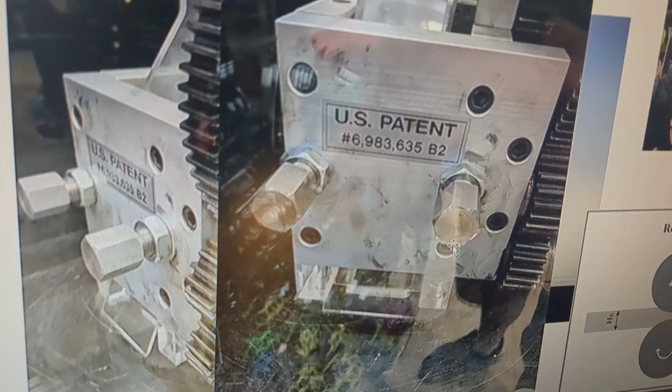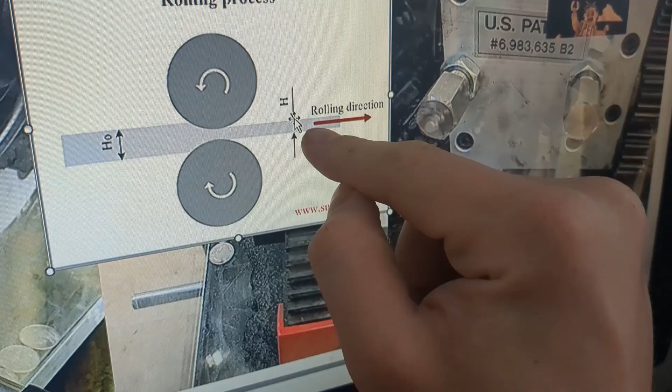One thing that I can't get over, my whole life I've been looking at this, the penny presses look kind of straightforward. All we got is a handle that goes into this crazy gear ratio and moves what's called a rolling mill. Basically, you put metal on one side, the rolling parts of it squish the heck out of it and spit it out a little thinner. And if you just put a design on the roller, heck, you can put any design you want on there and it squishes it onto the penny. It doesn't look that complicated. And I think, honestly, I could probably make one of these. And then I can take it to William Osman's Open Sauce and he's gonna go, that's pretty cool. And I'm gonna go, yeah, it is.

1 week later. So I got good news and I got bad news. The good news is I got the university to pay for my project. Because it teaches a manufacturing process, the manufacturing professor was interested in making the design, especially if it outputs the amount of force that is pushed onto the rollers, onto the pennies. The bad news is I went and talked to the machinist that we have on staff at the university, and he told me that I'm probably not going to be able to do it within one semester, which is what the university is willing to pay for. The reason is that an entire gearbox with that kind of gear reduction is gonna take more than a semester to make. It's just gonna.

But one thing that I could do is purchase a jewelry rolling mill that already exists online. They're typically made to roll jewelry or make necklaces or something stupid, I don't know. But what I'm gonna do is purchase it, take it apart, modify it, use the gearbox that's already included, and put it inside of my penny press machine. And so that's what we're gonna fucking do, I guess. All right, so here's the update as of fuck.

I'm sitting here measuring tons of pennies to see how they change in thickness, how they change in size and width and everything to put it into my CAD model, so that way I have a good idea of what the rollers on the mill are supposed to look like.

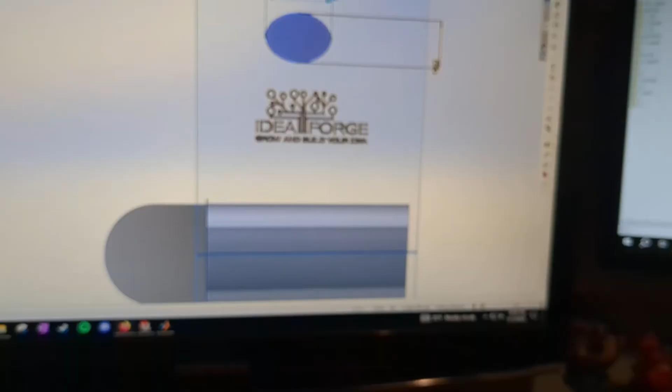Basically, as soon as I had the design on the rollers, I started sending it to a bunch of different job shops in the area, trying to get quotes. And as they were coming back, they were crazy expensive. So I started to reach out to other companies that may not specialize in this, or very specialized companies that have laser engravers and stuff like that.

And as I was waiting for those specialized and not specialized quotes to come back, I realized that I needed to start working on something else in order to get this project done on time. So I started jumping into the electronics and getting the Arduino working, getting the Raspberry Pi working, figuring out how to use Python. So that's what I jumped into next.

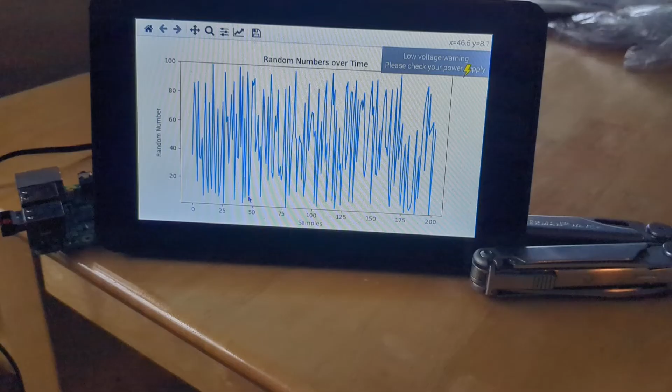All right, I finally got an example code working. Ignore the low power voltage. That's more of a guideline. But right now, it's graphing nothing. It's graphing noise. It's graphing meaningless data.

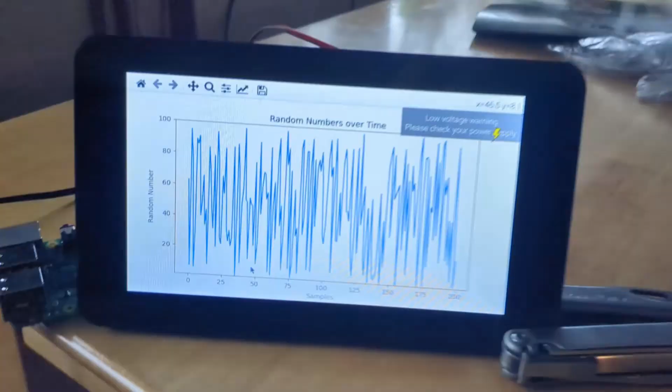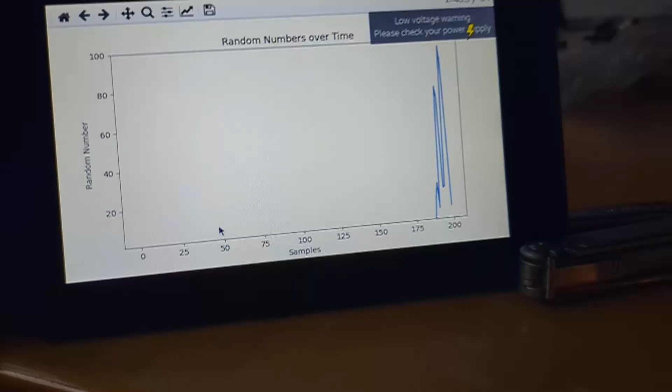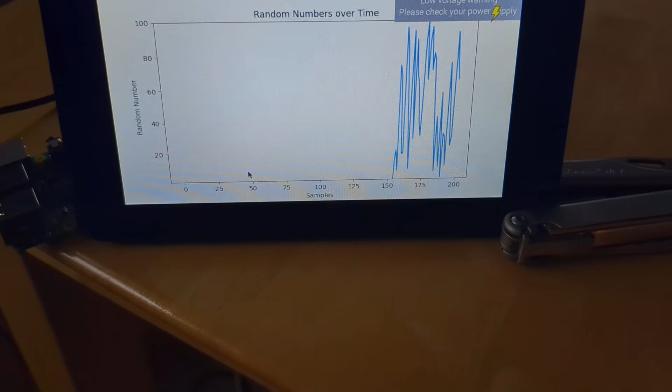But when I click this button, it shows me the data, closes it, and then I click the data again, and it starts over, shows the data all over again, which is going to be analogous to the sensor on the guy stopping and starting over, and it turning on and off is going to be that. Yeah, that made sense. I don't care if that doesn't make sense. This took 4 or 5 hours, and I haven't eaten yet. Look at it go. Yay.

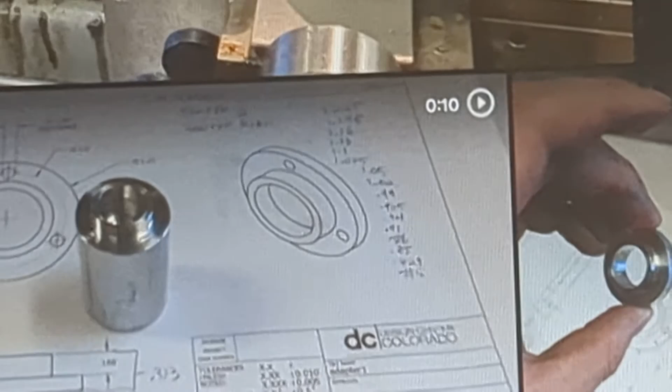All right, just real quick, I need to come up with a bridge between this video and machining the first part. This little part here is an adapter for the load cells that will be mounted onto the penny press machine. The only issue is I bought the load cells from China, so they took a long time to ship. So in the meantime, in order to get this project done on time, I needed to make the adapter so that way I had it ready for assembly when it finally showed up. So let's jump into a documentary about how this was made.

There's no way any of this is going to be usable, but I'm machining the adapter part right now to the correct diameter so that way this can hold onto the load plate, the load cell, without damaging anything. And right now it's going great. We're almost to the diameter that I want, and I will check back in once this is complete.

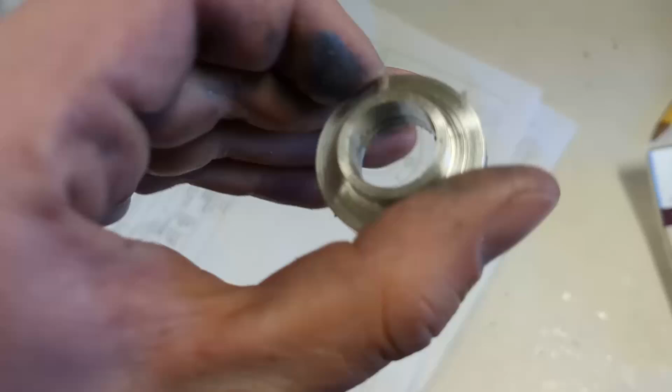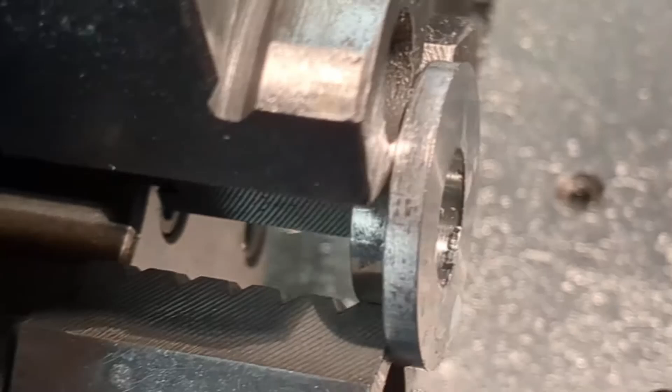There's definitely no way any of this video is useful, but now I'm drilling a hole through the center. I took this video, but I did it in this way, and that way sucks. So here's my part. Still gotta clean up the back of it, but there she is, baby. All right, last thing, we're gonna make the back half of it the right dimension so that way it's what it is on my drawing. Here it is, it's all set up, and let's do it.

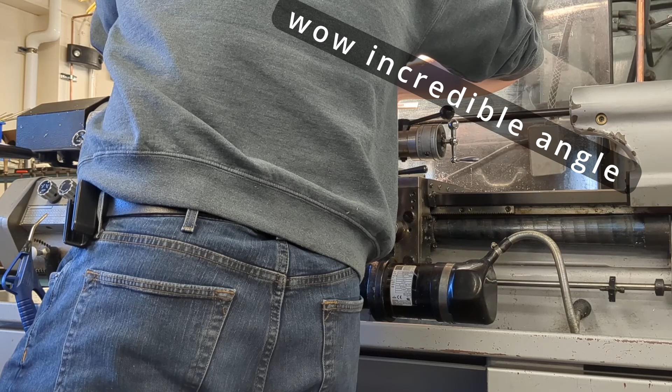Edge finder? I hardly know her. Got him.

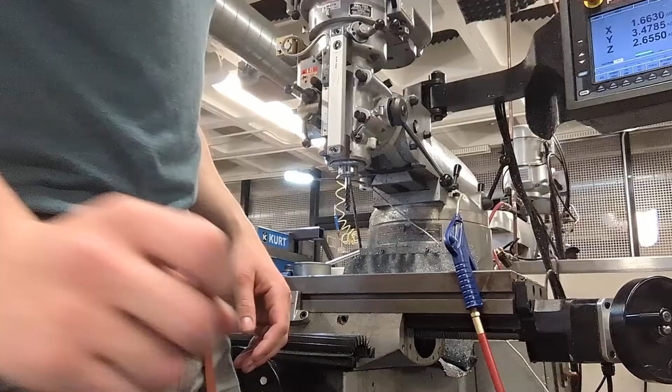So fun fact, I finished the part, but the screws are not going to fit between the wall and that hole. So we're completely starting over, making a new design that instead of having this lip on the inside is just going to be thick all the way through. Think about things twice before you fuck them up, guys. That's the lesson here, kids.

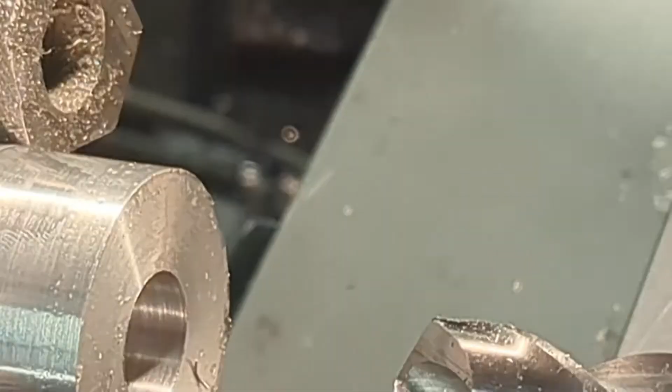Would you believe me if I told you I just jammed this in there without it running? Just all the way through without even trying? Because if you did, you'd be stupid. I turned it on first. I forgot to say it, but

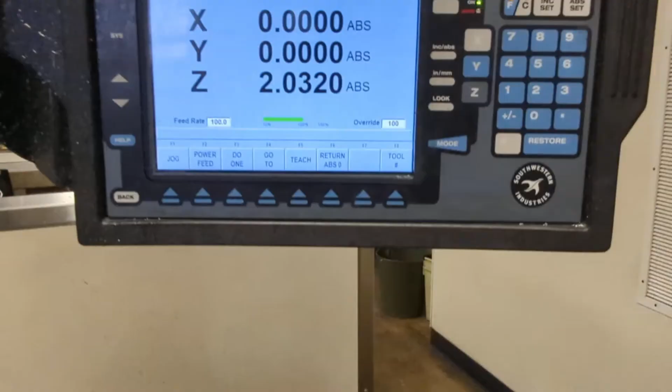Edge finder again. I hardly know her again. Fucking nice, dude. Got him again. 2 in a row. Oh, I almost dropped it. Let's have video evidence of me fucking this up. Mode. Run. Go.

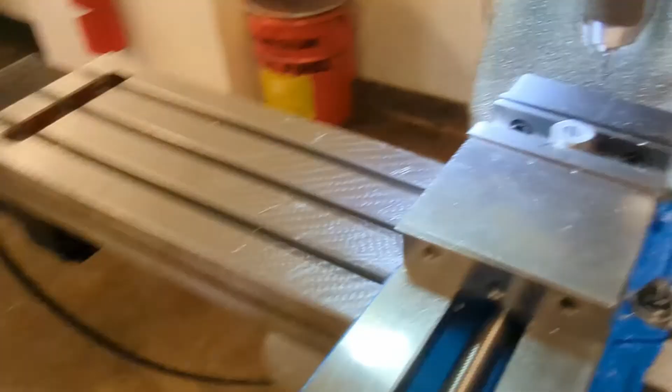Start. Go. Load tool. Go. Oh! Oh, it did it. Whoa, that is not flat. Did you see how much that moved? Oh, shit. I gotta edge find again. Fuck. She's not as, like, sexy looking, just because it's more of a lame part, but that's it. It's gonna be cut in half twice, and then it's gonna be that, but better and actually work. Let's go! Kinda looks like a face.

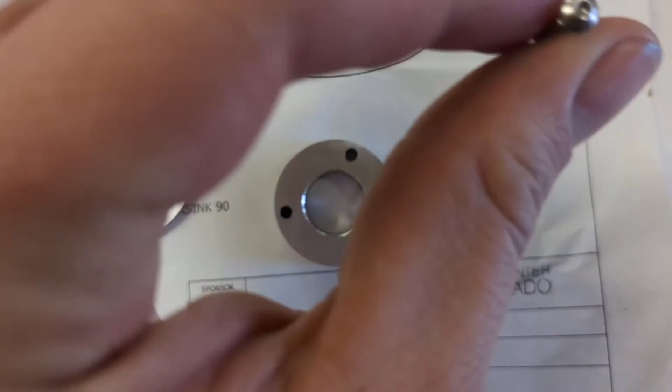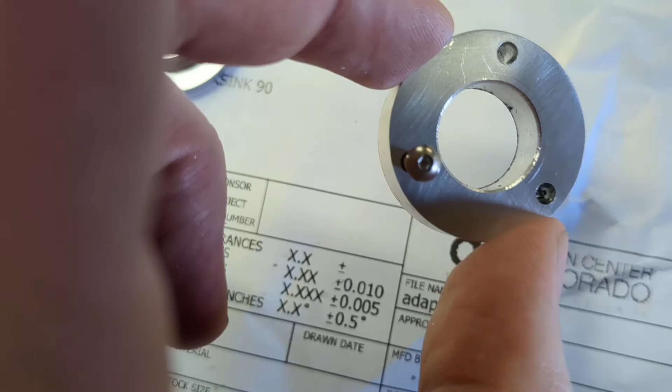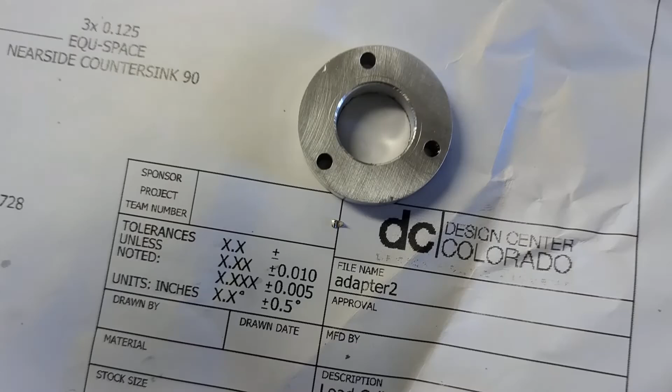Oh! Alright, so we redesigned this part because we were worried that the screw wouldn't fit in those holes. So we redesigned it to use more aluminum, and now, obviously, if I put it in correctly, it fits, right? Like, wow, perfect. No big surprises there. But then we were like, man, I wonder if it will fit in here. Yeah, it fits. We wasted time. We're still gonna go with this design because it's simpler and simple is better, but damn. All right, fuck me.

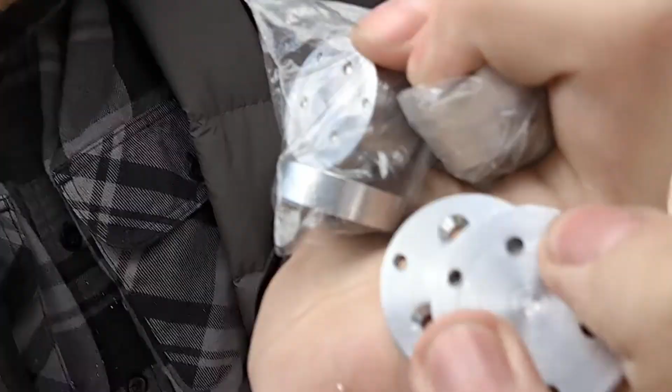Right, I'm running from the machine shop. That's the machine shop over there, because I'm gonna be late for office hours, but I got the parts done. You can't see it there. I got the parts done. There they are. They're countersunk, and that's not the side that's countersunk, so you can't see it. There's the countersink, it's on the bottom one. So that's looking good. And now I need to connect it to the load cells, which should be coming in the mail anytime now. And if they are coming in the mail soon, then I'm gonna put them on right now.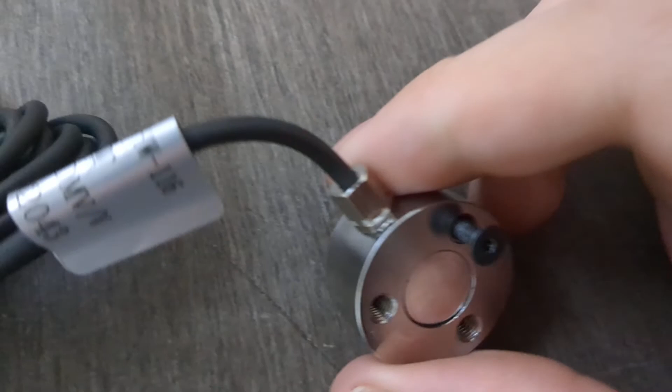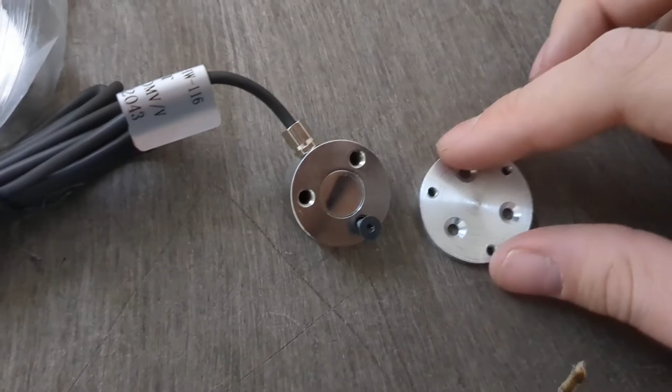1 week later. So I'm literally filming this on a trash can because I don't have a desk. But the load cells arrived in the mail and everything is good. And the holes line up just fine. It's kind of hard to see, but they line up. The only issue is that even though the spec sheet looked like it said M3, it is definitely not an M3 screw. I think it's just gonna be a super quick fix. I think I can just widen these holes and everything's fine. That's just a small loss right there.

Whatever. I finished the adapters for the load cells, and I was waiting for the rolling mill to arrive in the mail so that way I could guarantee that it fit. However, it was still in the mail. So what I did was I drove to the local steel yard and I bought some steel members and I started prepping them to weld them into the main frame.

All right, so even though we bought the steel, and you think that we can just take it to the machine shop immediately, we cannot, because this is what it looks like when it's clean. That's how it looks when it comes from the vendor. It's all dirty and crap. I mean, look at my hands. Jeez Louise, my phone's gonna be dirty for years.

But it's dirty, so we gotta clean it, which means lots of scrubbing and spraying and scrubbing and spraying. This is the third one. We got 2 clean ones, and we got 1 more dirty one. So hopefully we're able to get into the machine shop today. If not, I'll do it tomorrow, I suppose. Yay!

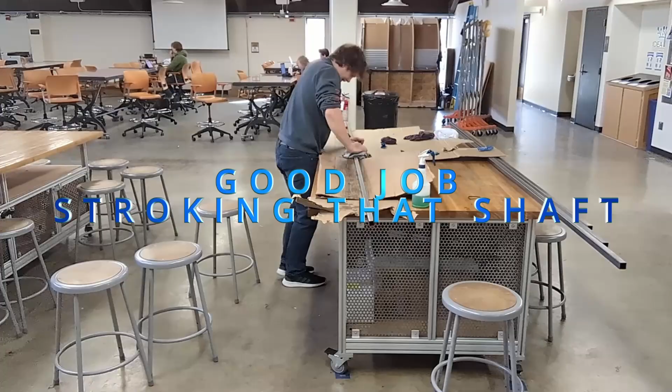After I cleaned all of the members, I needed to print out my drawings to bring down to the machine shop, because without an engineering drawing, the machinist won't let you cut anything. So cut to me printing all of my drawings.

Oh, the printer. We're gonna print. Gotta sign in. Wait. Don't look at my information. Don't do it. Hiding it. Can't see it. Oh, I just dropped all my coins on the floor. Why am I doing this one-handed? There has to be a better way to do all this. Oh, look at my coin.

Wow, I really hope my ID wasn't in this at all. That'd be so bad. Okay.

Files to print, all of the files. Print. Sweet, oh that one. Printing. Yay. First person to tell me what's wrong with this drawing wins a point - they only printed half of my drawing, which is probably fine. All my information is on that half of a drawing, but god damn it, son of a bitch.

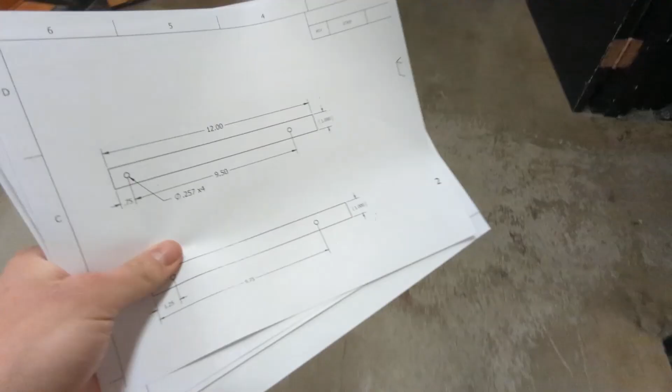Whatever, I'm gonna bring it to the machine shop, we'll see if they're okay with it. Fuck it, it's getting loud in here. Gotta walk all the way over here and show them the chaos that is my homework.

Let's see. Look what happened to my drawings. That's fine, they're fine? Yeah, they're all like that. They're fine? Alright, we're gonna do it.

Alright, smash cut to all these being cut except for one right now. They're cut. We got all of them. And then we just gotta mill them, which is gonna be fun, can't wait. We're gonna do a test fit to make sure they all lay, and we got some scrap.

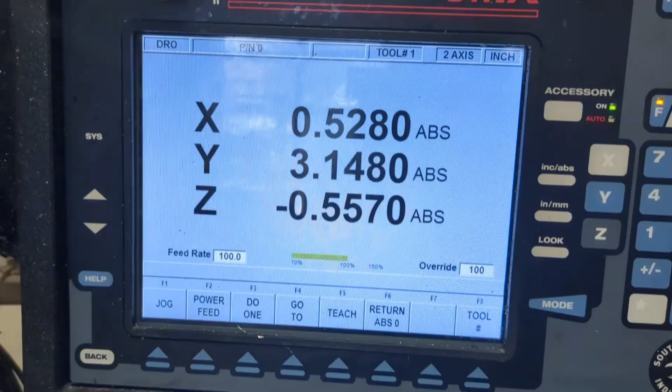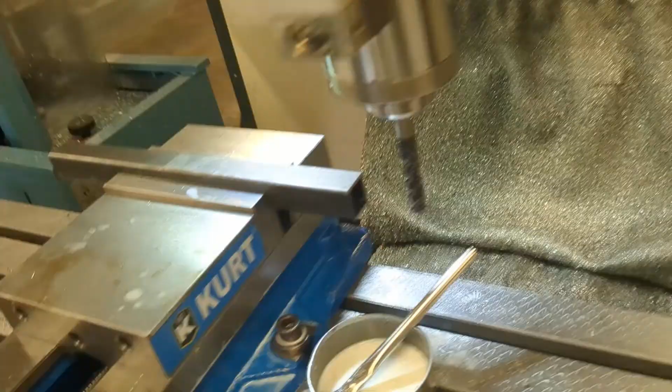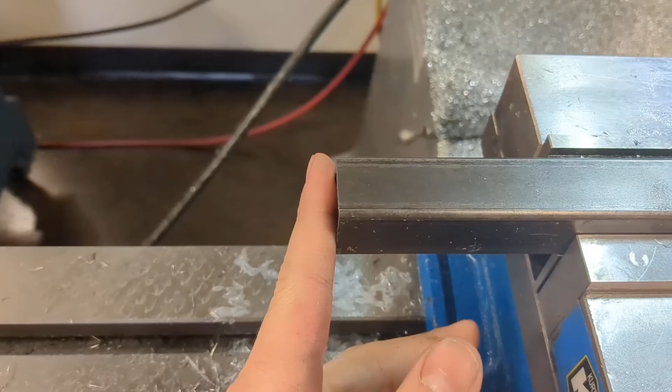So we have dimensions here that don't mean anything relative to my part. So what I do is I take this and I touch here and I cut a tiny bit off, and then I tell it that that's my zero. And then I go to the other side of my part and I start cutting on this side until this gives me exactly 12.5. Why 12.5 when my dimensions clearly say 12? Well, because my bit here has a certain radius, and the diameter is 0.5. So when I go on this side, in order to guarantee that this is 12, this needs to be 12.5, and I just shave it off until it is.

And then I put it over here and add it to my collection of perfect ones and keep working on my unperfect ones. Thumbs up. I just want to get a video of how much this smokes while I square it up.

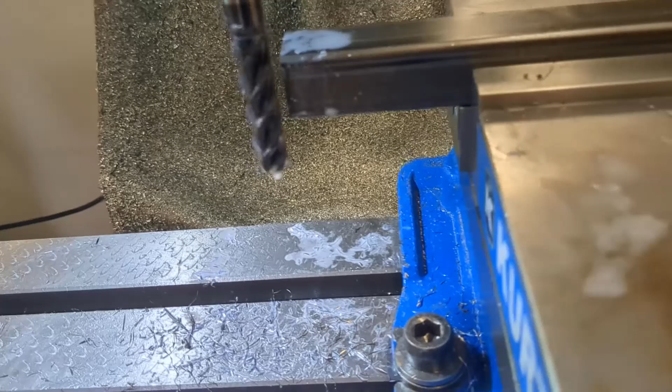Check it out, here we go. It's gonna smoke more than usual because I can't lube it in real time, but check it out. It's like the least amount of smoke I've seen all day, but it happened, whatever, I don't care.

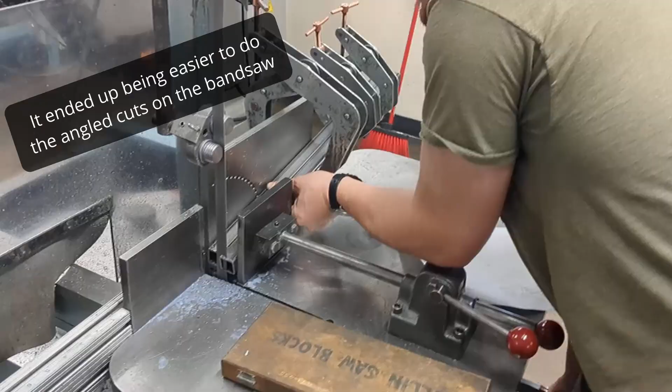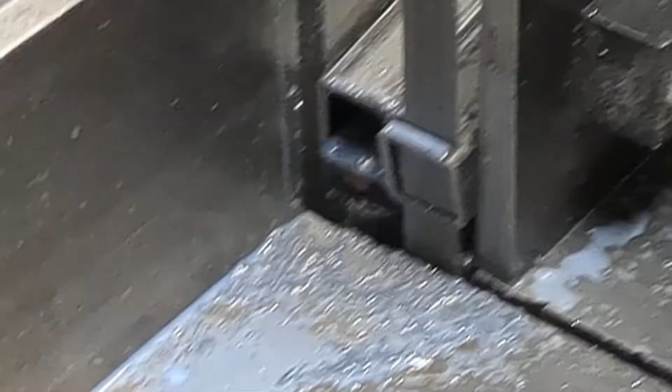Oh, this is going well. Oh, did we do it? Almost, I need to do my job. Do my job again.

Oh nice, that's supposed to happen.

Alright, now there's no way you can hear me, but we're gonna sandblast all the pieces in here so that way they're easier to weld. I'm gonna do that now. There's really no way to, it's not cool because you can't really see it, but I got gloves in there and we're just gonna sandblast away.

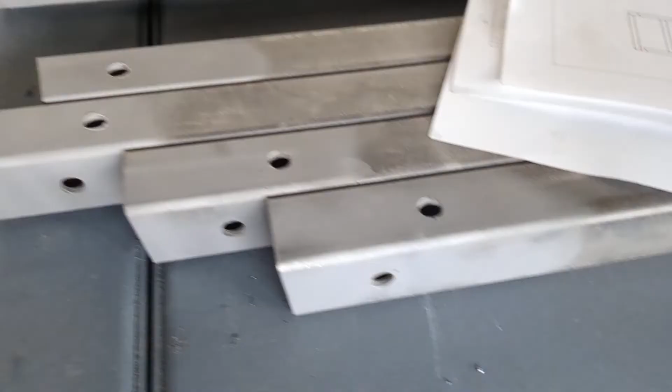Here we go, a few moments later. You can see that this is now sandblasted, just like its brothers, all lined up in a row. There's those, there's all these. This one is sandblasted all the way through because it needs to be welded into the middle. These are all sandblasted, they're ready to weld, ready to weld, ready to weld.

We got some spare material back there just in case. And I may or may not have dropped that one in the sandblaster and ran around the place like a chicken with my head cut off trying to find it. But we're good. Do I look cool? I don't feel cool.

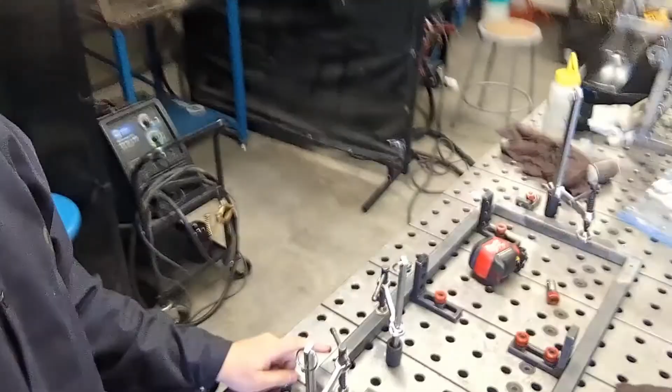We're gonna do the bottom frame first. I'm gonna tack it up and weld it. I'm gonna do it next to Baja, that's next year for me. And we're just gonna start with this little guy, and I don't know, we'll see how it goes.

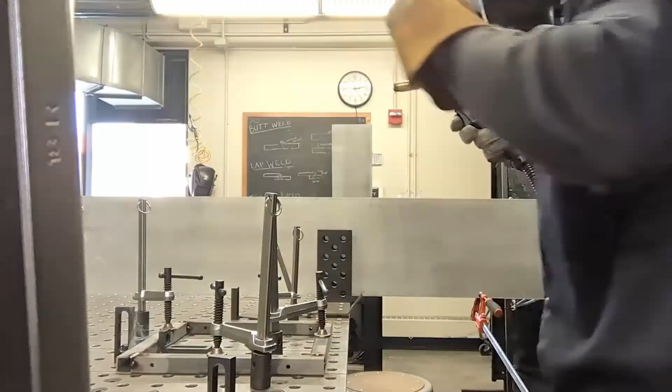Alright, so I kind of fucked up, like pretty bad. This is gonna take a lot of time to fix. On that side, the holes are on that side, right? You can see that? On this side, they're on the top, and that's not how it's supposed to be. This one's supposed to be 90 degrees, and I also really shittily welded it fully on. So we're gonna get an angle grinder and try to undo that, turn it 90 degrees, and re-weld this piece to fix it.

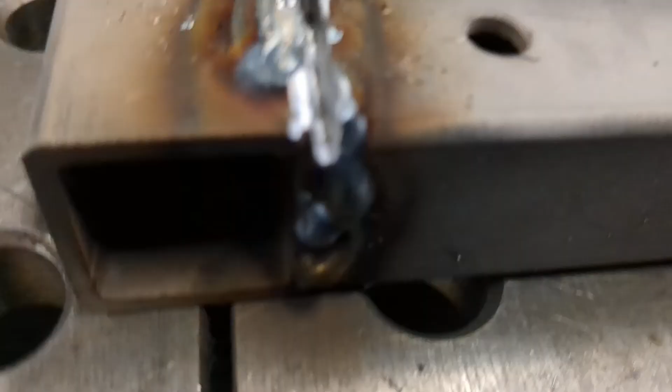So we're trying our best to angle grind this weld undone so we can fix it, and we're trying to attack this guy, and then the big shop guy left to get the bigger shop guy to truly actually fix this and make it right.

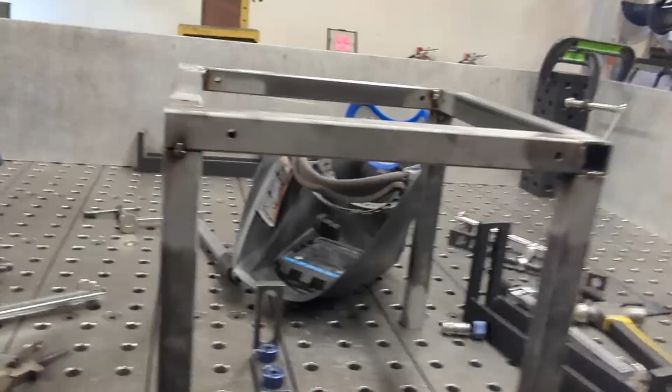I'm really stressed out. Like, of course I'd fuck that up. Of course I would. Why am I stupid? Fuck me. Despite all my anxiety, we got it going. The top is all welded and grinded and ready to roll, and these are all tacked up with nowhere to go. Fuck yeah.

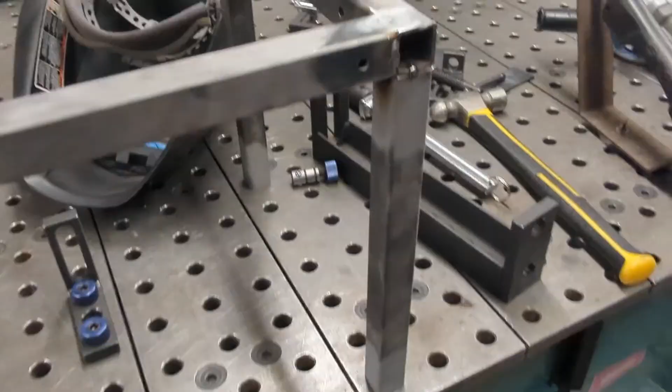Now we're gonna get the bottom half that I welded last time, put it on the bottom, take those members over there, put the mill on it, line it all up, and then it's gonna be great. All right, that's what it's gonna look like. The top isn't welded to the bottom, and thank God it's a little not aligned right now, but that's nothing we can't fix.

And look, I think it's about the right size. Here, let's see how this looks. I don't know if you can see it, you definitely won't be able to see it there. Shit, that, I don't care. That's how good it's gonna have to be. That's pretty good, crank it here, comes out there. Fuck yeah dude, this is great.

Everything's good, thumbs up. While I was welding all those parts, the mill itself arrived in the mail. I also found somebody who would engrave the rollers for me at a discount, since he was a hobbyist penny press collector as well, and he had a pretty high watt super laser thing.

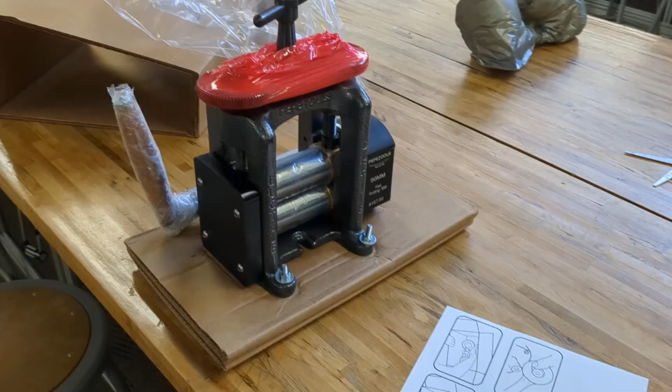So cut to me getting the penny press and figuring all that out. All right, it's incredibly heavy, but the top of it is not red, that's just the wrapping on it. But it was in there, now it's there. Check it out, they're even clean too.

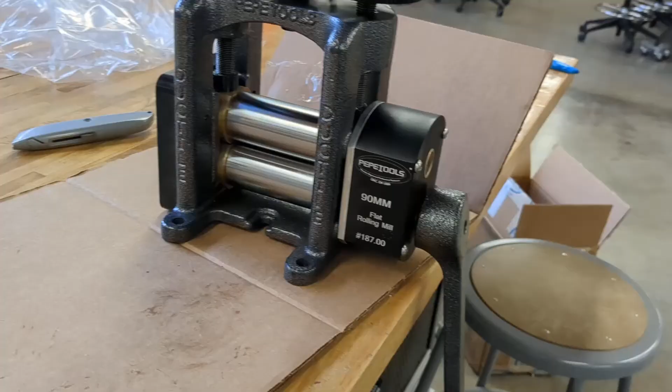Nice, all right let's go. Let's keep going. There she is. All ready to rock. I'm gonna run around and see if I can find a penny to do a test squish. But hell yeah, looks good, looks great.

All right, after concluding testing, we got a few pennies that I throw on the floor and are gone forever. We have a few other pennies that kind of worked, like this one is kind of squished, but not really. You could probably pass this off as actual currency.

We have a really good one. I think this is probably what I'm gonna base all my measurements off of. Focus. This one's really good, and this is a perfect world penny, but this took multiple passes to get down to this size. So we'll see how it goes.

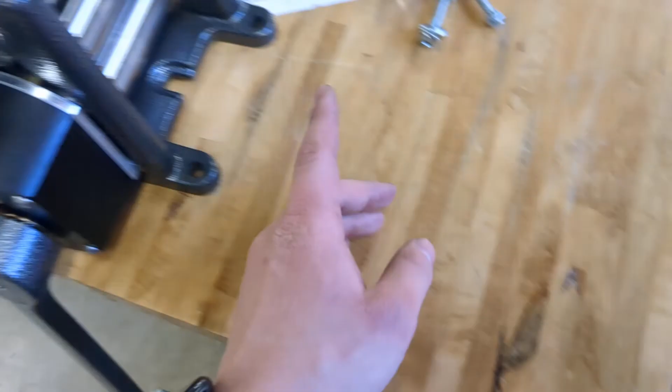The biggest issue I had right now with squishing these is that this isn't actually bolted down to anything, so you could just lift this up and move it while you were squishing the penny. So obviously that's lost forces, but we'll see. Right now I think I'm going to use these two as measurements and send it to the guy who's going to engrave these rollers. So I need to take apart this mill and yeah, get the roller out.

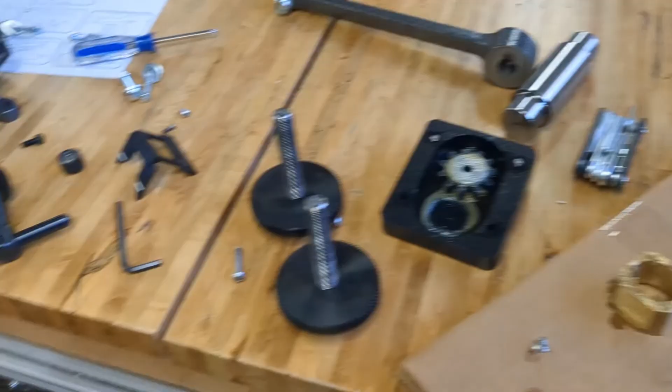All right, now the beautiful mill is all in pieces and spread out around here. I have to clean it up, but here's the roller. The roller is ready to be shipped out and engraved, so I'm gonna do that now. And then I'm also going to do my best to clean all this up so that way I don't get yelled at by the people over there who are in charge. I'm just kidding, they're very kind. But that's the plan now.

So I'm running late to my system dynamics class, but I just disassembled the mill and the roller is in this package. So we're gonna ship it after class and hopefully get it engraved over spring break. I also have a handful of test pennies, so hopefully I can give them really good dimensions to engrave it by, and hopefully everything works. Because if it doesn't, I don't know what I'm gonna do. But so far it's going good.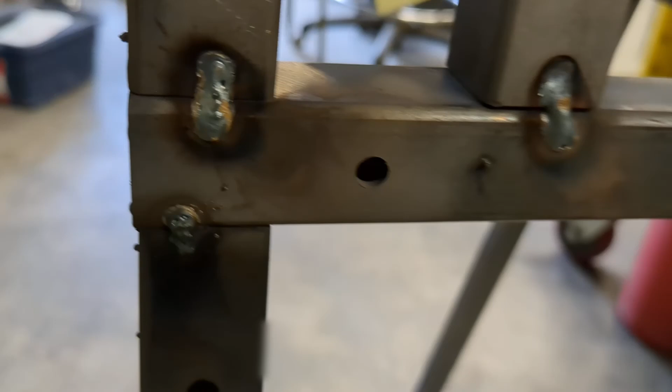Yeah, it's a big day. It's all tack welded up. We're gonna do the visual inspection to make sure I didn't fuck it up. I don't even care if I did. Some of these welds look like an amateur did it, which they did, but I don't even care. It's there, it's working, it's not even that wobbly, all things considered.

You can't even really see it on video. Fuck yeah dude. And people are gonna drop their penny in, boop, and then they're gonna say oh that's so cool dude, thank you. And then, you know, thousands of hours of work will be justified. Fuck yeah dude, yeah.

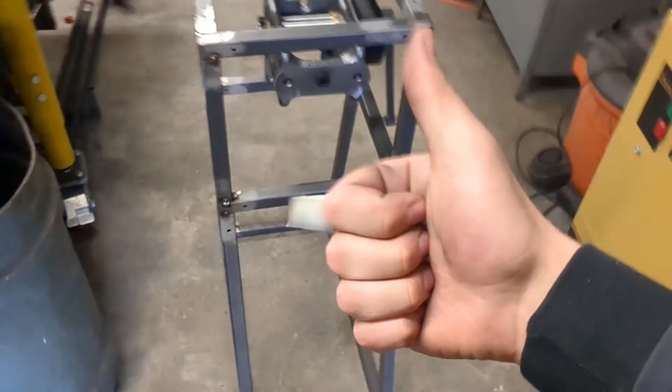Welding time. Hopefully this time I don't weld in a way that's backwards and upside down and wrong. But I shouldn't, because everything's tack welded now, so I should be able to just send it.

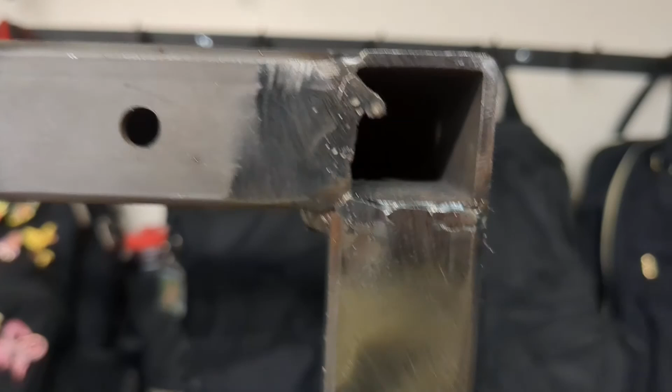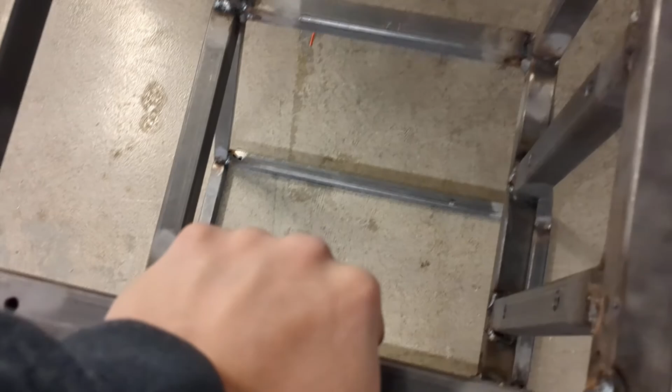All right, here's the frame. I did my best to hide my horrible welds by grinding it out, because a good welder always grinds—that's not true, never repeat that to anyone who's an actual welder. But these are all smoothed out, so hopefully I can put the acrylic sheets on it. It's strong enough to support me, so should be good.

All right, I need to transition into this video, which I don't really have right now, but basically, when I finished up welding the frame, the only thing that I could do until the rollers arrived was test fit stuff.

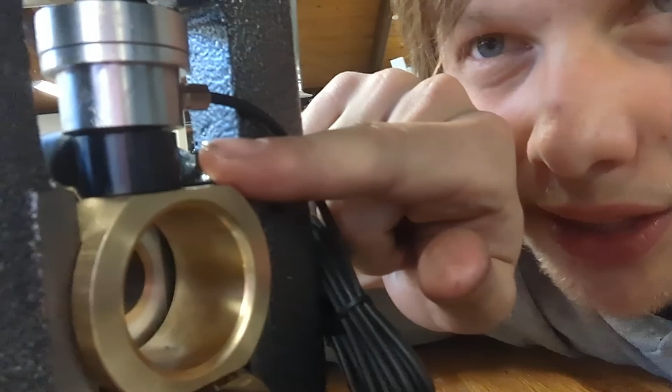Right in there is my load sensor and the load sensor adapter. This is what came with the mill. This is the load sensor, and that's the load sensor adapter, and there's the screw on the top. You can see that as I move it, it'll push this up and down. And if this was plugged into something, which it's not right now, you would be able to see the readings.

Isn't this a good shot? Thumbnail.

Okay, so at this point in the story, there's a pretty important thing that happened. I could very easily skip over it because it didn't really impact the end product at all, but in the moment, it felt like the end of the world. It was terrible. I spent all this time and all this money finding somebody to engrave the roller, and finally this guy was communicating with me. He did it at a discount—super professional, super kind. And I finally got the package back from him, and it was freaking empty.

It looked like it was ripped open, like somebody might have taken it. I tried to call the post office, I tried to call the school mailing system, I tried to do everything I could to find it or at least figure out what went wrong. But at the end of the day, it was just gone. It was a really terrible moment, scared the crap out of me. I didn't know what I was going to do.

So I reached back out to the guy who engraved the roller, and he said if I could get him another roller, he'd do it for free. Thank God, this guy is amazing, he's been super helpful. And as you can see here, I got the roller engraved and put it together, and I started doing some tests. I'll jump back into the videos here—I just felt like I needed to mention that part of the story. I didn't record a lot while I was trying to figure that out because it was so terrifying and stressful, but I felt like I should talk about it.

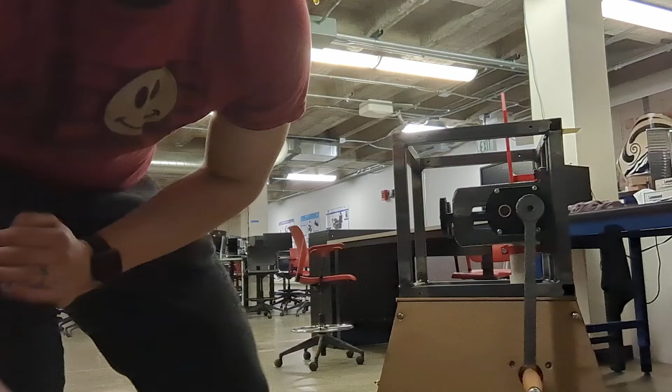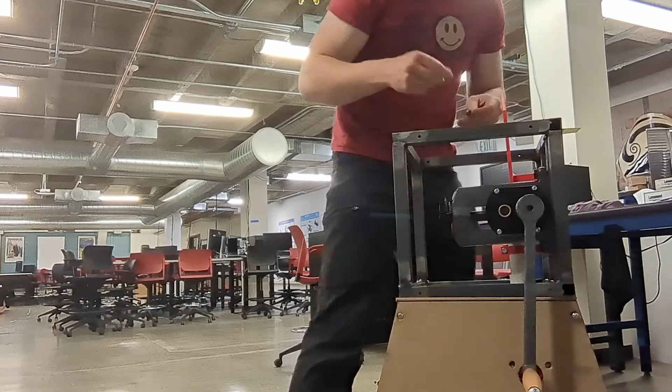Alright, I couldn't help myself—I did one test before I recorded it, and it looked pretty good. So let me show you how it works. You grab your penny—it's a penny, take my word for it. This is going to have acrylic in it, but for now I just have to line it up by hand, and then you just crank it. It's a little harder than I anticipated, so maybe only the big, strong adults will be able to do it.

Now check that out. Okay, let's get better lighting. Let's get way better lighting. Now check that out. Wait, focus. Focus on... focus. I don't know why it's not focusing.

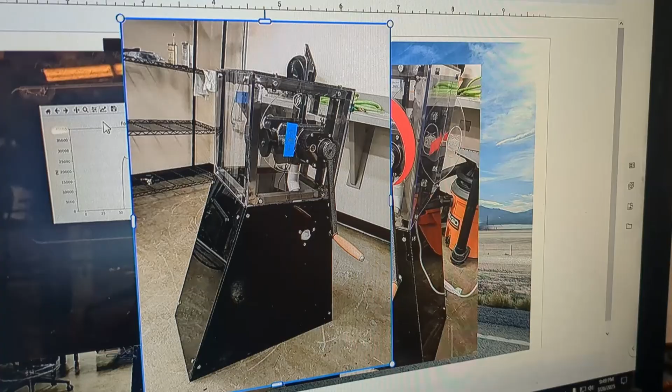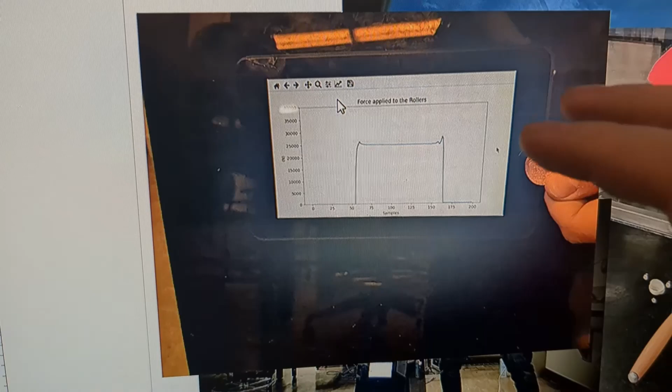Alright, now that I knew the mechanism was working correctly, I just needed to get the penny press ready for OpenSauce. So the first thing we did was CNC these polycarbonate panels and make sure all the holes lined up, then mounted it onto the assembly itself. Then I put in the electronics and made sure the sensors were reading and displaying the information correctly, which it was, of course it was.

Then I took this awesome photo for OpenSauce. I definitely needed a haircut back then, but who cares—that's only permanently on the OpenSauce website now.

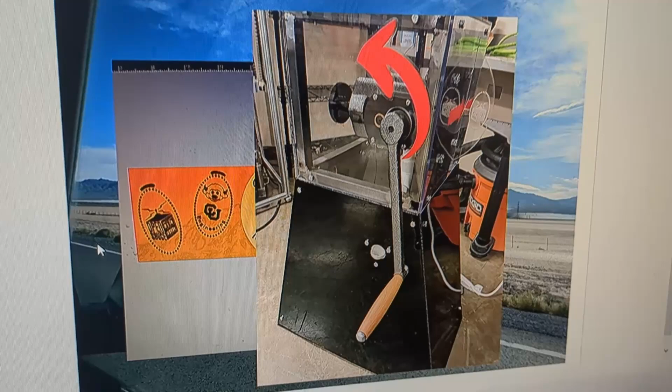Then I put this big red arrow on it because I found that people's intuition was to do it the wrong way, which would cause the mechanism to get jammed. So the arrow works 50% of the time, but that's better than nothing. Then I made this big banner so people walking by OpenSauce could see all the different designs and make a cool little souvenir, and they knew what they were doing. I'm pretty proud about how that came out—I like it a lot.

Then we packed that all in the back of a small Subaru and road tripped across the country to OpenSauce. I don't know if you've ever heard of Alien Fresh Jerky, but it's in the borderline middle of nowhere, and it's totally themed out the wazoo. But they're building a new hotel, so this is going to be a UFO hotel, and in the back they have a convention center.

We have the exhibitor pass. Sorry, Rob. All of us. Sorry, Rob. Okay, sorry, Rob. Now we're gonna unload that thing and put it in that hall.

Oh my God! Careful! So you can imagine how from this point on, things started moving really quickly. As soon as we were there, we were setting up, getting messages from moderators on the Discord, trying to coordinate everything at once. I don't have a lot of videos, but I got a few really cool ones I want to show off, and I'm going to try my best to make this smooth from this point on.

Before we even got there, we got a message from one of the moderators on the Discord asking if we could show up a little bit early and set up on Thursday instead of Friday. We were like, hell yeah. And then when we got there, we were told that they were going to have a news segment and do a panning shot of all the exhibits, and William's going to talk about some stuff and then head out.

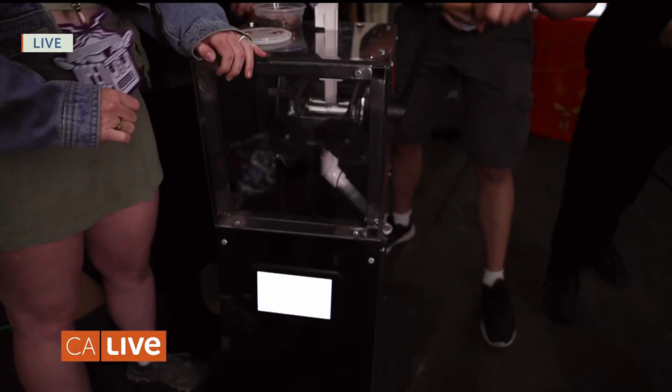Okay, and then we're moving on to students from Colorado who built a penny press machine, custom for OpenSauce. Oh, like what you see at the fair. Yep, exactly. You put a penny in and some other money, but this one's different because it shows you how much force was exerted on the penny. Oh my gosh. And then it engraves something. Yep, and you got the OpenSauce logo on there. That's super cool, so college students from Colorado. Yes, go Buffs. Oh, okay, represent.

And that's pretty much the end of the penny press's story that year. We showed it off at OpenSauce, I took a bunch of photos, and I'm not really sure how to compile those into the video for you, so maybe now they just pop up in the video. Bam, that one. Bam, that one. Bam, another one. That one stays on the screen a little longer for some reason. What about this one? Bam, whatever, stuff like that.

Overall, we had an amazing time at OpenSauce that year. We were at the Cow Palace, so it's a bit of an older venue, but overall we had a really great time. This year at OpenSauce 2025, I exhibited a completely different project just because I wanted to bring in as many people in my engineering group as possible to work on one project.